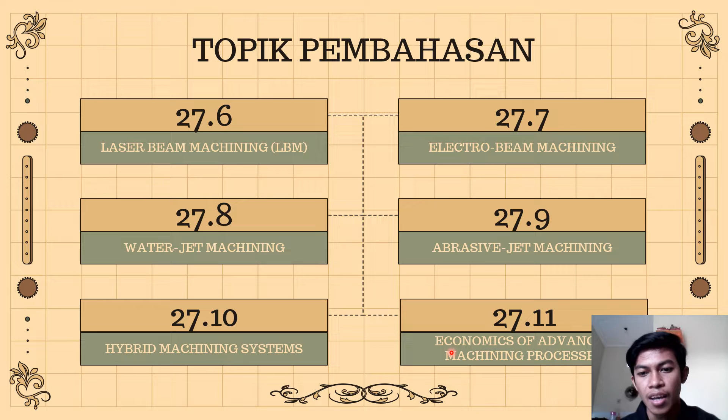Adapun topik pembahasan pada presentasi kali ini, yang pertama akan membahas mengenai laser beam machining, kemudian ada electro beam machining, kemudian yang ketiga ada water jet, yang keempat ada abrasive jet, yang kelima hybrid machining system, dan yang keenam ada economic of advanced machining process.

Yang pertama, laser beam machining atau LBM. LBM ini adalah proses permesinan non-konvensional yang dimana laser diarahkan ke benda kerja untuk proses permesinan. Proses ini menggunakan energi panas untuk menghilangkan logam dari permukaan logam ataupun non-logam. Sumber energinya adalah laser yang merupakan singkatan dari Light Amplification by Stimulated Emission of Radiation, yang dimana laser ini memfokuskan energi optik pada permukaan benda kerja.

Untuk lebih jelasnya, pada slide berikutnya saya menyediakan sebuah video yang saya ambil dari YouTube.

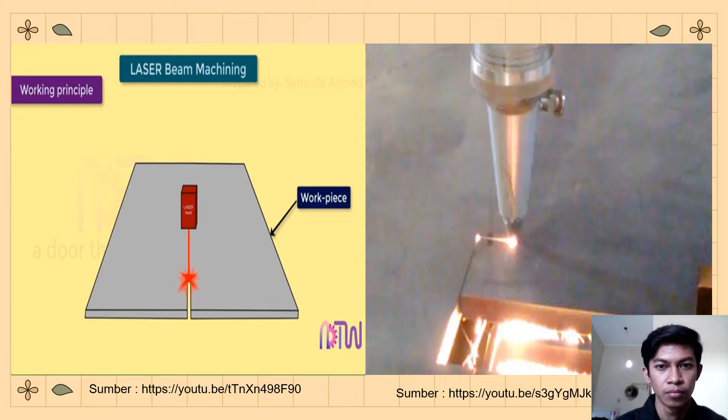Dan ini merupakan proses pemotongan pada sebuah material yang menggunakan laser beam machining.

Biasanya pengaplikasian dari LBM ini digunakan untuk pemotongan parsial atau ukuran, dan biasa juga digunakan dalam produksi permesinan mikromassal.

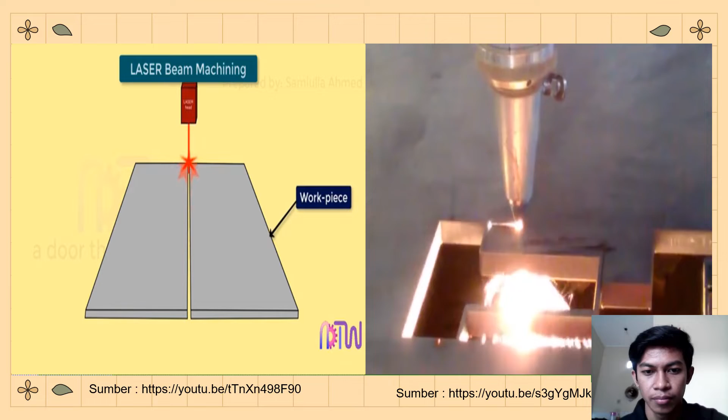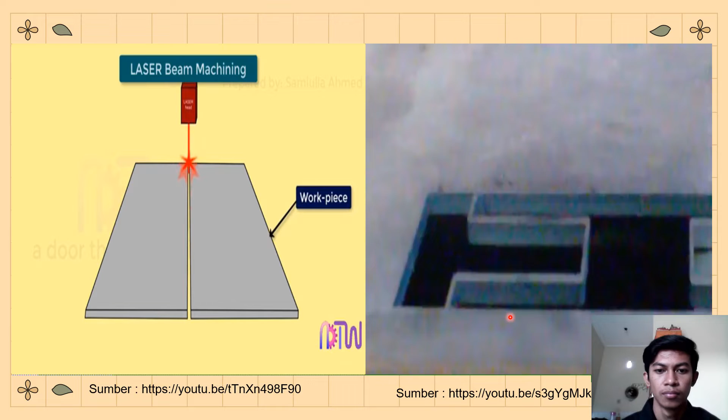Selanjutnya ada electro beam machining atau EBM. EBM ini merupakan permesinan non-konvensional juga yang digunakan untuk permesinan pada material yang sangat keras maupun yang rapuh yang tidak dapat dikerjakan oleh permesinan konvensional.

Di dalam EBM, elektron diubah menjadi energi panas yang menumbuk permukaan benda kerja dengan gerakan yang sangat cepat. Energi panas ini menguapkan permukaan benda kerja, mirip dengan proses LBM pada slide sebelumnya. EBM ini digunakan untuk pemotongan berbagai macam logam.

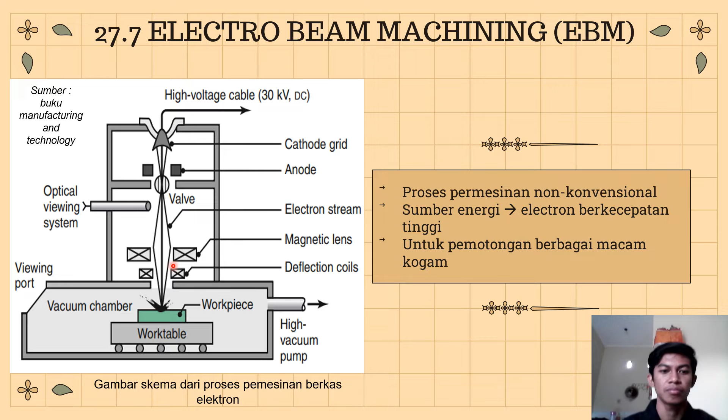Ini terdapat sebuah video mengenai proses dari EBM.

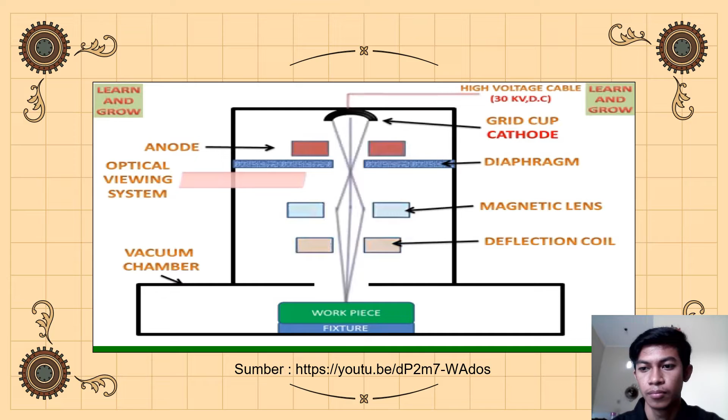Selanjutnya ada water jet machining atau WJM. WJM ini merupakan mesin yang menggunakan pancaran air untuk memotong lembaran logam. Contoh prinsip pengerjaan dalam mesin WJM ini adalah apabila jari kita diletakkan pada ujung keran air, maka cucuran aliran dengan tekanan tinggi akan mencuci kotoran yang melekat di jari kita secara efektif.

Pada mesin WJM ini terdapat komponen-komponennya. Untuk lebih jelasnya, mari kita lihat pada slide berikut.

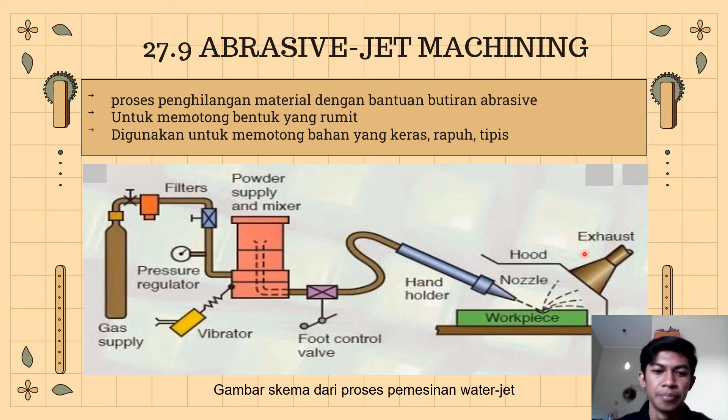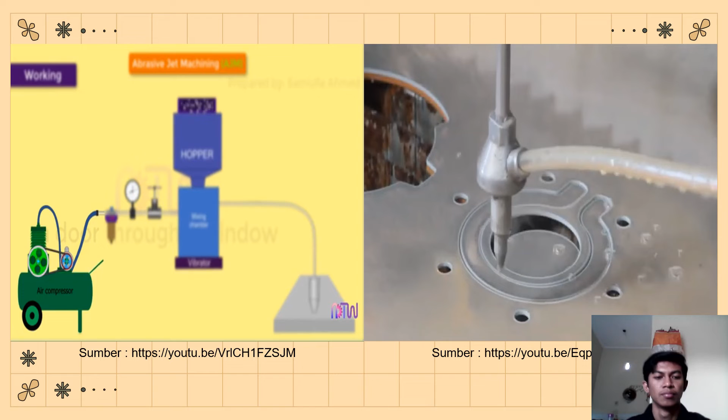Working: the air is drawn by the compressor. It pressurizes the gas to higher pressures. Usually the air is compressed to a pressure between 25 to 130 psig.

After the compressor, there is a filter. The function of the filter is to clean the impurities present in the atmospheric air. After the filter, there is a pressure gauge, which shows the exact pressure of the air coming from the compressor.

Then the compressed air passes through the pressure flow regulator valve. The function of the valve is to regulate the flow rate of the abrasive jet.

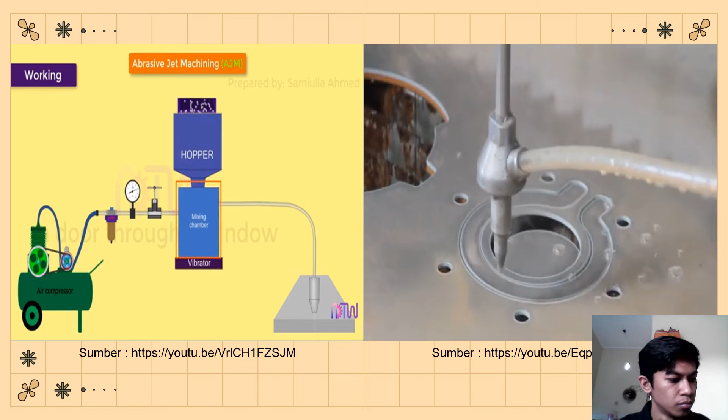After this, air passes to the mixing chamber, which is used to mix the gas and abrasive particles. Here, the abrasive particles are fed with the help of a hopper. The usual size of the abrasive particles is about 0.001 inch or 0.025 millimeters.

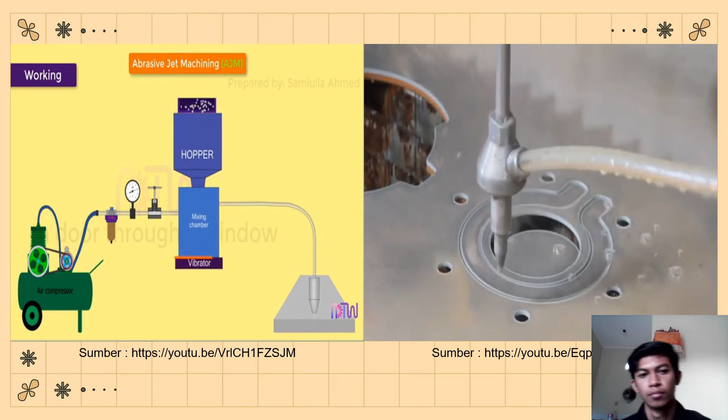A vibrator is provided below the mixing chamber. It controls the abrasive powder feed rate in the mixing chamber. Abrasive powder and the compressed air are thoroughly mixed there.

This pressurized mixture of air and abrasive particles is sent to the nozzle. The nozzle increases the velocity of the mixture at the expense of its pressure. As the pressure drops outside the nozzle, all the pressure energy of the jet is converted into velocity, and this high velocity jet hits the workpiece.

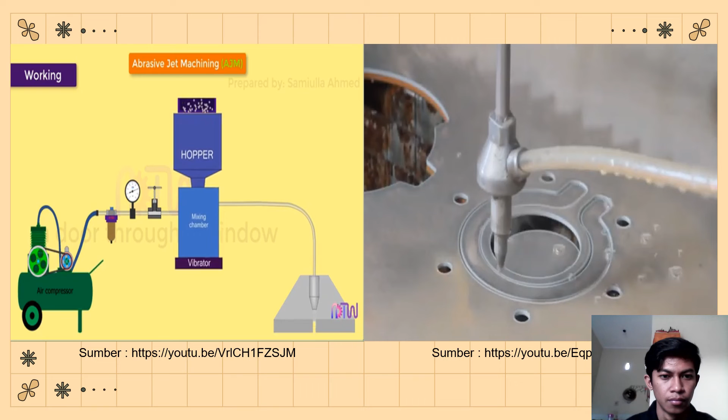This jet is used to remove unwanted materials from the workpiece. This is how abrasive jet machining works. Since we understood the working...